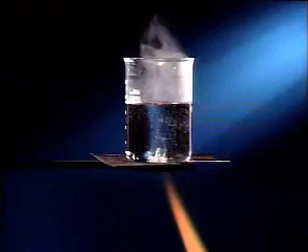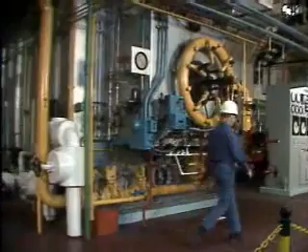To produce steam, you need heat. Plant boilers rely on combustion to generate this heat. To generate heat and produce steam efficiently, boilers need proper combustion equipment, devices like burners and stokers. Safe and cost-effective steam production also requires careful control of the various boiler flow paths. For example, boiler operators need to monitor and control air, water, and steam flow.

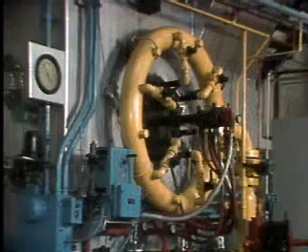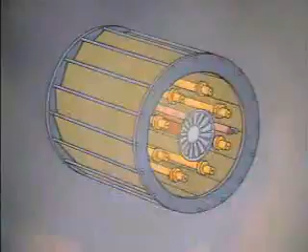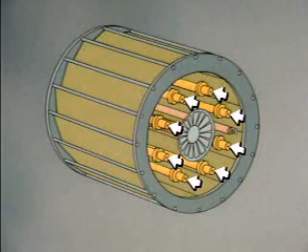The main function of all burners is the same: to inject a mixture of fuel and air into the boiler's combustion area. Burners are used with fuels that mix easily with air, such as natural gas, oil, or pulverized coal. This burner, for example, is a typical gas burner. It uses dampers or registers to regulate the amount of air entering the burner. Pipes called spuds inject natural gas into the boiler. This is an impeller, basically a stationary plate with openings, or vanes, that cause the air to swirl around and thoroughly mix with the gas.

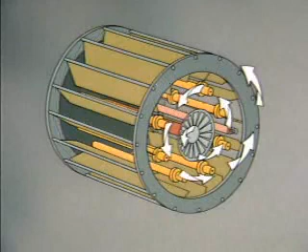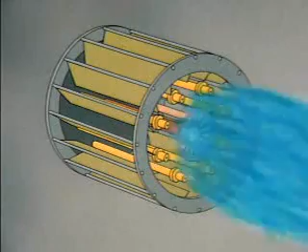An igniter starts the gas-air mixture burning. This one has a sparking device that uses electrical current to create a spark across a pair of electrodes. The spark ignites the gas-air mixture. As it burns, it provides heat for the boiler.

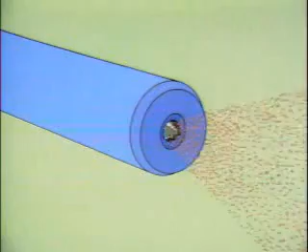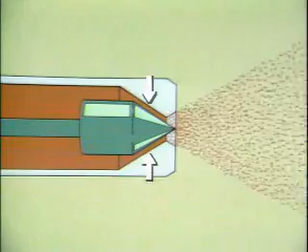Since oil is a liquid, it has to be changed into a mist, or atomized, before it can mix well with air and burn. This example is a mechanical atomizer. Mechanical atomizers depend on the pressure of oil passing through a nozzle to produce a fine mist. Fuel entering the atomizer flows to a sprayer head. The oil is forced through the nozzle, which breaks the oil into droplets. The droplets are sprayed into the combustion area in the form of a fine mist.

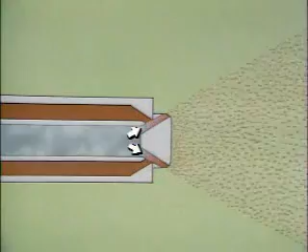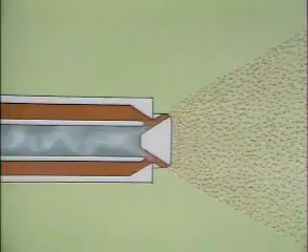Here's a type of atomizer that can use either steam or air to atomize oil. Steam or air flows through a tube and then to a nozzle in the sprayer head. Oil is supplied through the atomizer to the sprayer head, which directs the oil into the path of the high-velocity steam or air. This breaks the oil into a fog-like mist as it enters the combustion area. This action makes the oil easier to ignite and burn.

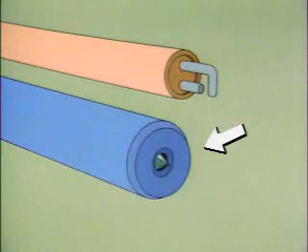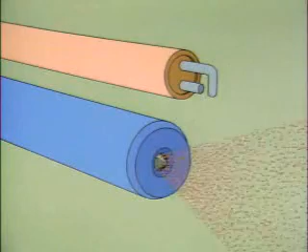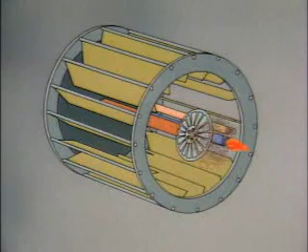To start the oil mist burning, there's an igniter. This igniter consists of a sparking device and a separate atomizer which serves as a pilot for the burner. A small amount of oil is sent to the igniter atomizer. The oil flows through a nozzle, which creates the mist. The spark ignites the oil mist. After a flame is established at the igniter, oil flow to the main atomizer is started, producing an oil mist. Then the igniter flame ignites the oil mist, and the combustion process begins.

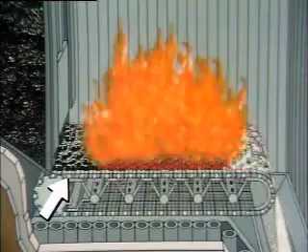Some boilers are designed to burn solid lumps of coal. A device that supplies and burns lumps of coal is called a stoker. Stokers can also burn wood chips or other solid fuels as well. This stoker has a series of grates to hold the coal. A drive mechanism moves the grates through the combustion area of the boiler.

The coal is stored in a hopper. A gate controls the amount of coal fed to the grates. As the coal moves along, air is forced up through the grates to provide the oxygen needed for combustion. The burning coal moves through the boiler's combustion area and supplies the heat needed to produce steam in the tubes surrounding the combustion area. Coal ash falls off the grates into an ash bin.

In this topic, we saw the major types of boiler combustion equipment. We looked at gas burners, oil burners, and stokers. Let's take a minute now to try some practice questions.

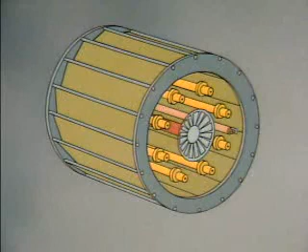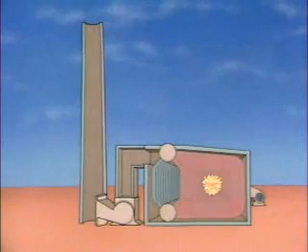This burner, for example, is a typical gas burner. It uses dampers or registers to regulate the amount of air entering the burner. Pipes called spuds inject natural gas into the boiler. The airflow into a boiler provides oxygen for combustion. Gases produced during combustion flow out of the boiler and are discharged from the stack. The flow of air and other gases through a boiler is referred to as draft.

The components typically used to provide draft are fans. There are two basic categories of draft fans: forced draft fans and induced draft fans.

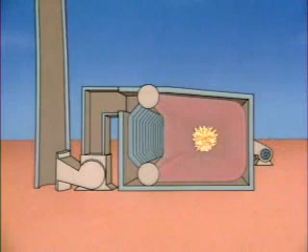As their name implies, forced draft fans force air into the boiler. A forced draft fan draws air from outside the boiler and forces it through the burner into the combustion area. Induced draft fans create draft by drawing combustion gases from the boiler.

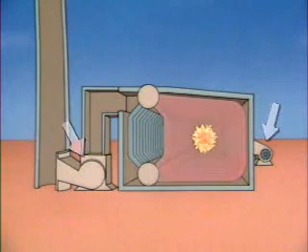Many boilers operate with only a forced draft fan. However, some boilers need both types to provide the proper draft. For example, in this boiler, the forced draft fan supplies air to the burner. Then, the induced draft fan draws out the hot combustion gases.

The demand for steam from a boiler is called boiler load or steam load. When boiler load increases, more fuel must be burned to produce more steam. When boiler load decreases, less fuel must be burned. Changes in boiler load also require changes in the airflow to the boiler.

The mixture of fuel and air supplied to a boiler is called the fuel-to-air ratio. It's important to maintain the proper fuel-to-air ratio to avoid combustion problems. For example, if the boiler is not getting enough air, some of the fuel entering the boiler won't burn. Instead, it may get carried out with the combustion gases and wasted. In some cases, unburned fuel could build up in the boiler. This buildup could cause an explosion if the fuel were ignited.

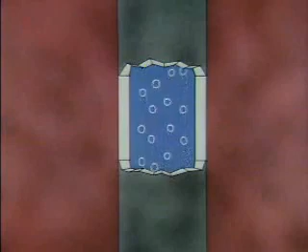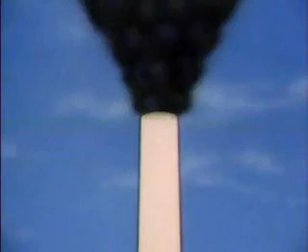In oil-fired boilers, unburned fuel may create soot deposits that coat boiler tube surfaces. Soot buildup interferes with heat transfer and reduces the boiler's ability to produce steam. In extreme cases, you may also see black smoke coming from the stack of an oil-burning boiler that's not getting enough air.

On the other hand, if a boiler gets too much air, some of the fuel is used up to heat the extra air. This heat flows out of the boiler with the combustion gases. As a result, there's less heat available to produce steam.

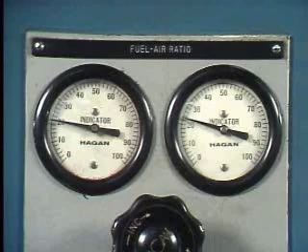Most boiler operating procedures specify the proper fuel-to-air ratio. In addition, many boiler control systems automatically adjust the fuel and air mixture as boiler load changes.

In some boilers, the air supplied to the combustion area is preheated. Preheating the air raises its temperature closer to the point where ignition occurs. This, in turn, helps to ensure efficient and complete combustion.

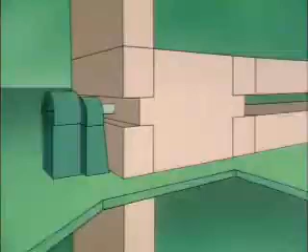One way to heat the air flowing into a boiler is with a rotary air heater or preheater. This one consists of a series of heating surfaces or elements which are connected to a motor-driven shaft. The top half of this heater is in ductwork that routes hot combustion gases from the boiler through the air heater and on to the stack.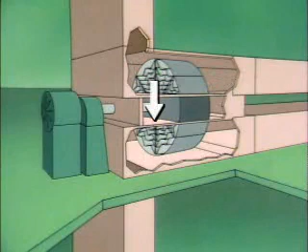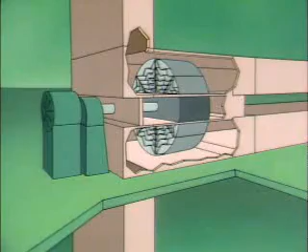The bottom half is in ductwork that directs incoming air through the heater and on to the boiler. A seal prevents hot combustion gases from mixing with the air flowing to the boiler. The heating surfaces rotate through the hot combustion gases.

In this section, the heating surfaces are warmed by the hot gases. Then, the rotating heating surfaces transfer heat to the cooler air flowing to the boiler. The warmed air is sent to the boiler's combustion area. With this design, heat that would otherwise leave through the stack unused preheats the air entering the boiler, so the boiler operates more efficiently.

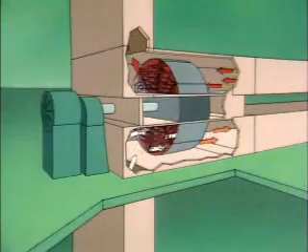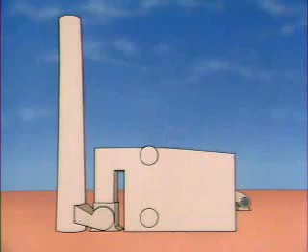The mixture of fuel and air supplied to a boiler is called the fuel-to-air ratio. It's important to maintain the proper fuel-to-air ratio to avoid combustion problems. For example, if the boiler is not getting enough air, some of the fuel entering the boiler won't burn. Instead, it may get carried out with the combustion gases and wasted. In some cases, unburned fuel could build up in the boiler. This buildup could cause an explosion if the fuel were ignited.

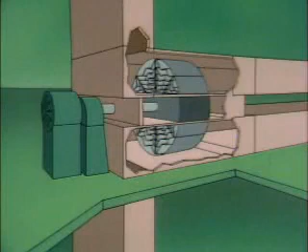One way to heat the air flowing into a boiler is with a rotary air heater or preheater.

For a boiler to produce steam, water has to flow through the boiler properly. One way to provide water flow in a boiler is by a process called natural circulation. This simplified water tube boiler illustrates how it works.

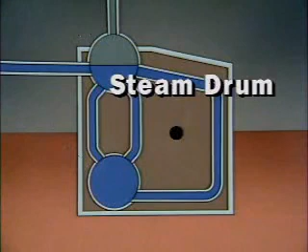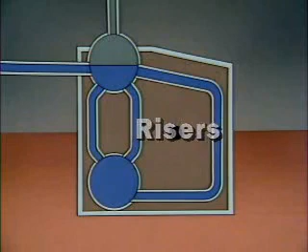The boiler has two drums. The upper drum is sometimes called a steam drum, and the lower drum is often called a mud drum. There's also a series of water tubes called risers, which carry a steam-water mixture to the steam drum. And this one has a downcomer, which carries water from the steam drum to the mud drum.

Boilers normally have several downcomers. In addition, there's a feed water inlet and a steam outlet. The water tubes and the lower drum are filled with water. The steam drum is only partially filled, leaving enough space for steam to collect.

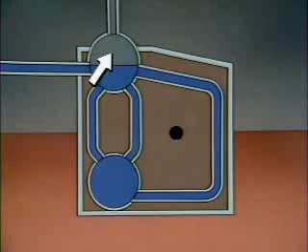As combustion occurs, the water tubes surrounding the combustion area heat up. As heat transfers to the water in these tubes, the water becomes less dense and lighter than the cooler water elsewhere in the boiler. Some of this water turns to steam. As a result, the heavier, cooler water flows downward into the lower drum, and the lighter steam-water mixture flows into the steam drum. Then, as the cooler water is heated, it too becomes lighter, rises to the steam drum, and is replaced by cooler, denser water.

The steam flows to the plant through the steam outlet, and the water level is maintained by water flowing through the feed water inlet. As long as combustion takes place, natural circulation continues.

Not all water tube boilers rely on natural circulation. In some cases, a circulating water pump is used to produce the flow of water in a boiler. This type of circulation is called controlled or forced circulation.

In this example, the pump draws water from the steam drum and forces it through the lower drum and the risers. As the water in the risers is heated, a steam-water mixture is produced. Water from the pump forces the steam-water mixture into the steam drum.

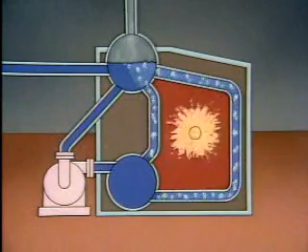If the pump circulates the water through the drums and the tubes, the boiler will operate as it's supposed to. Hypothetically, though, if the pump stops, the water will no longer circulate properly, and the boiler could boil dry and become damaged. To ensure proper water flow, most controlled circulation boilers use two or more pumps, so even if one pump stops, the other will provide enough circulation to prevent damage to the tubes.

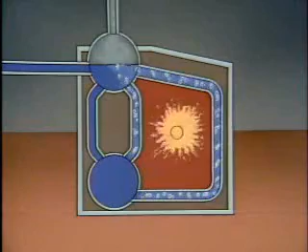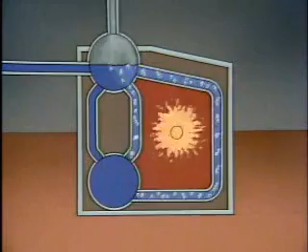With this type of water tube boiler, water circulation depends on the differences in density between water and steam. Mechanical devices, such as pumps, are not needed. This method of circulation is called natural circulation.

One way in which boilers are made more efficient is by heating the feed water before it enters the boiler. If the feed water is preheated, the boiler will require less fuel to produce steam. A device used to preheat feed water is an economizer.

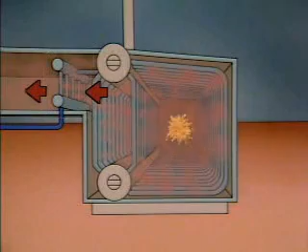Economizers are often used in water tube boilers. An economizer is basically a series of water tubes located in the flow path of the combustion gases. Feed water is routed through the tubes on its way to the steam drum, and the water is heated by the hot combustion gases flowing past the tubes. The economizer improves boiler efficiency by making use of heat in the combustion gases that would otherwise be wasted.

The steam produced by a boiler generally contains some moisture. Some plant processes require relatively dry steam, so the moisture could be a problem. To prevent equipment damage from moisture, some boilers are equipped with moisture separators, devices that remove moisture from steam before it's sent to the plant.

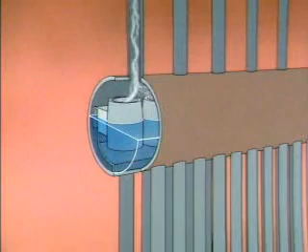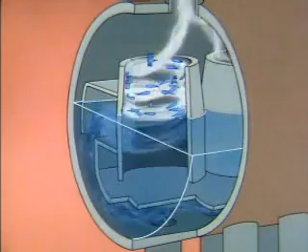One type of moisture separator is a centrifugal separator, or cyclone separator, located in the steam drum. It works by directing the steam-water mixture into a circular chamber. The circular shape of the chamber causes the mixture to swirl around, and the swirling action creates a centrifugal force. This force flings moisture droplets against the chamber walls, and then the droplets run back into the drum. The lighter steam flows out the top of the chamber.

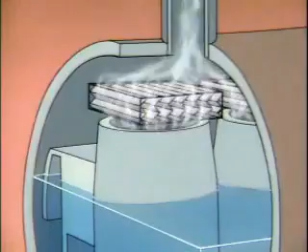Some boilers use a dryer along with centrifugal separators. This design is often found in processes where extremely dry steam is required. The dryer consists of a series of V-shaped plates, and the steam flowing through them has to make several changes in direction. The water droplets can't change direction as easily as the steam, so most of the droplets separate and drip back into the drum. The steam flows through the dryer and on to the plant.